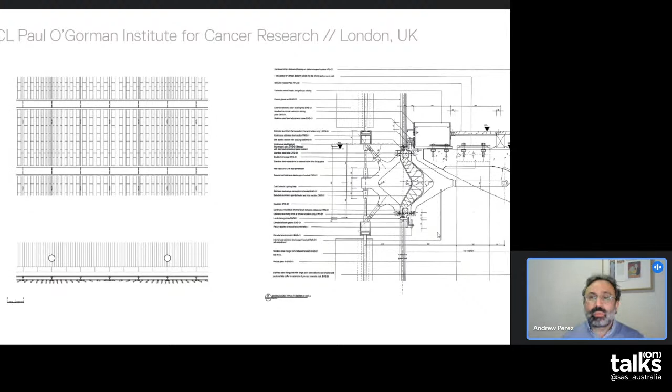They would draw their details in pencil at 1-to-1. For me, just beginning to understand how things came together in this very special way was a real learning experience. If you understand Grimshaw, it shouldn't come as a surprise, but for me, having come from Australia, it was a terrific experience working with wonderful people, putting this together, and then working on site as the site architect, seeing it all come together was really quite wonderful. The care that was taken, and taking the client through the journey, showed that these small things, the sum of all these parts, mattered.

One of the other impressive features was this sort of cantilevering stair. The existing building is the old UCL Hospital Nurses Home, which is a Grade 2 listed building, so our building abuts and connects to that. We have the classic architectural detail of the visual gap of this frameless glass connecting piece.

In that interstitial space, there was this terrific cantilevered central spine stringer precast concrete stair. There was so much structural reinforced steel in that precast stringer beam - it really is a steel stringer with a thin shell of concrete. But again, that all cantilevers off the floor plates and is connected to the glass facade with these simple pin joints that allow the stair to move.

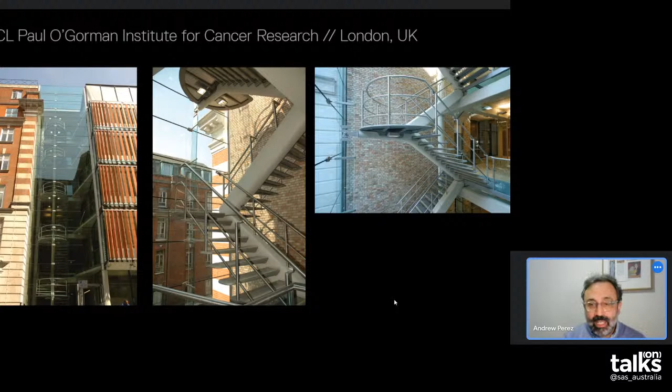It moves quite a bit and allows these glass restraining fins to slide up and down. There is no mastic or silicone or mechanical fixing here, so this whole system - stair, fins and glass - all move in unison. Working out the dynamics of that and understanding that attention to detail was a terrific experience for a young architect.

And again, working on some of these drawings, just trying to resolve that. It wasn't all glamorous - you can see here there's some cast-in conduit. There was no face-fixed light fittings here; they use light fittings under the half landings. So I also had the privilege of doing those cast-in conduit drawings, which is the less glamorous part of architecture.

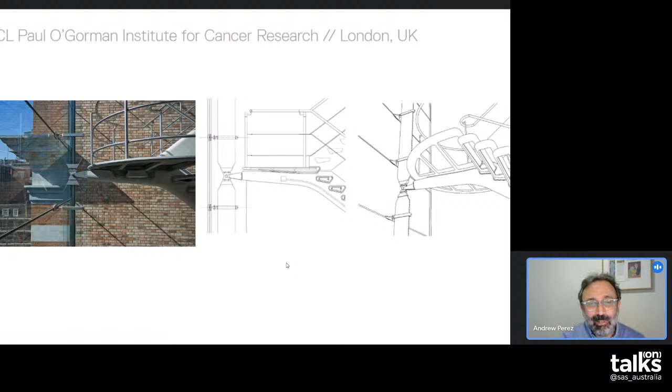But I guess we all go through that learning curve. And the other thing I realised was bang for buck. It's a simple series of stacked boxes, the building, of Grade 2 labs, with a Grade 3 lab on the roof space. So working to budget - if you look at the detail of the section here, all of that cast facade, terracotta, precast concrete happens in this front 5-metre write-up space. The rest of it is block work and simple stacked boxes.

I was understanding that part of the brief was that the building had to have a shop front to the street. They wanted to showcase these tremendous researchers doing life-changing work, so it was a shop front - though the researchers had a view about that. So we put all our effort in terms of budget and detailing to the front, saving our money at the back. Bang for buck was really important in order to respond to the most critical parts of the brief.

So I was starting to get an education about craft, materiality, context, conservation architecture, which is something quite new to a new country like Australia, but quite entrenched in Europe, and understanding the politics of budget.

And then the interior spaces again - this is the write-up area where all the researchers do the work, nice day-lit spaces through those terracotta louvers, these wonderful precast soffits, the reception area, French limestone, this anthracite desk. So celebrating materiality, and it was quite deliberate choices.

There's some off-form in situ concrete, the existing handmade bricks of the listed building next door, European oak, but not selected, so we were expressing the knots and the veins, and the stone to the reception desk, again expressing the natural characteristics.

The building, again, with its cast finishes, was quite machine-like, but the interior materiality we were very keen to explore, I guess, the warts and all imperfection of it all as a bit of a contrast.

One of my favourite pieces of the building is these precast soffits to the write-up areas that follow the force diagram. Where the forces are working, supported by the column, the precast concrete is up to 450 millimetres thick, but where forces aren't working in these coffers, it's scooped out and right down to about 90 millimetres thick. So this column is holding this piece on these flanges, and it suspends the pieces adjacent.

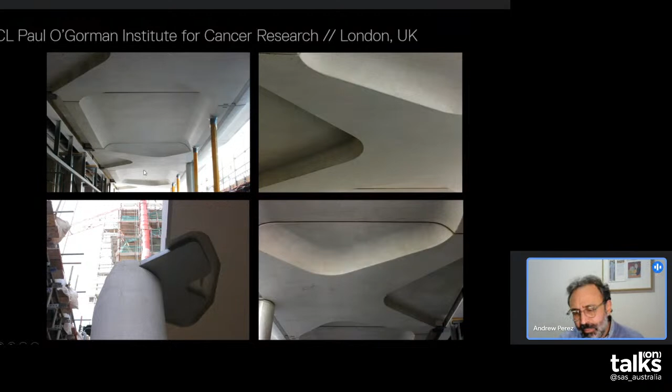That was working with a Belgian precast contractor, a tiny firm in Belgium, but very specialist work. Again, it was really working out the finest details, and the point of all this was concrete only where you needed it. So there was a real exploration of materials for that building.

Like I said, for me it was a wonderful introduction to Grimshaw. I'll talk about the next project, which is London, and I talk about this because it's a completely different end of the spectrum, but it set my career on a specific trajectory.

My boss at the time, Mark Middleton, who I believe might be on the call, asked me to do some work at Heathrow, a seconded role out at Heathrow Airport. I was quite reluctant, but Mark assured me it was going to be a good idea, and he was not wrong.

This was about the strategy, really. Understanding high-level detailed planning, complex statutory issues, and a very large client cohort.

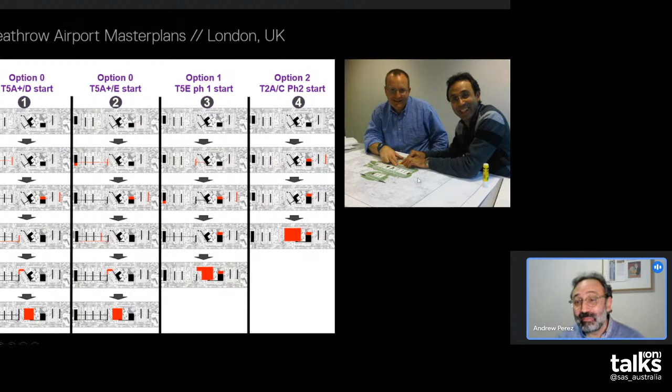A lot of my time on this project was spent going through little thumbnails, understanding all the permutations of runway locations, terminal locations, and literally cutting and pasting them on plans with the client.

But it was really a fascinating understanding of how an airport works in all its parts, how it works in its statutory framework. Basically, it was a sort of a master's class in international aviation, for which I really began to take a real interest in.

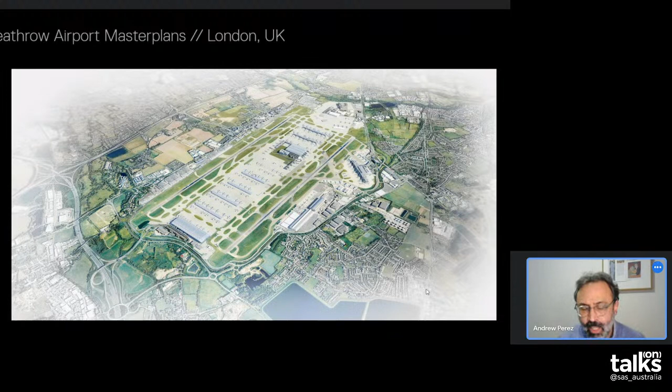It was fascinating. Again, it's the complexity, so many interesting moving parts, and it's distilled into these images that were used for press. But it sort of set me on a path.

As a result of that, after 2 years—well, it started as a 3-month secondment and ended up being nearly 2 years—I left that project and was considered a sort of an expert in aviation. At the time I didn't realise that, but then I quickly realised I'd learned an awful lot there.

Back in the studio, one of the next aviation projects I worked on was Istanbul's new international airport. Whereas I was talking about UCL about craft, Heathrow about understanding strategy, what this airport project brought me about was scale.

This is a brand new international airport in Istanbul. This is a rendering that we did to present the idea. This terminal, brand new terminal, is 1.2 million square metres of GFA. That's quite mind-boggling, really. This is the terminal that was, after design was resolved and submitted, built about 2 years later at incredible speed.

It's just a very, very, very large building.

So all that I'd learned at Heathrow about aviation and terminal planning was understanding how to, in the first instance, get the footprint right, so that people wouldn't be walking for kilometres and kilometres to get their gates. There was quite a bit of planning about understanding where you could optimise the building shape.

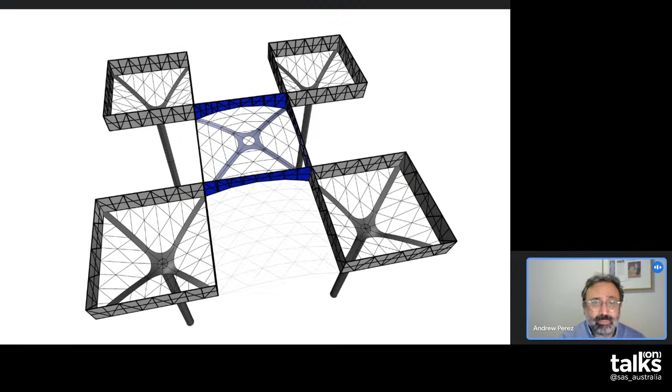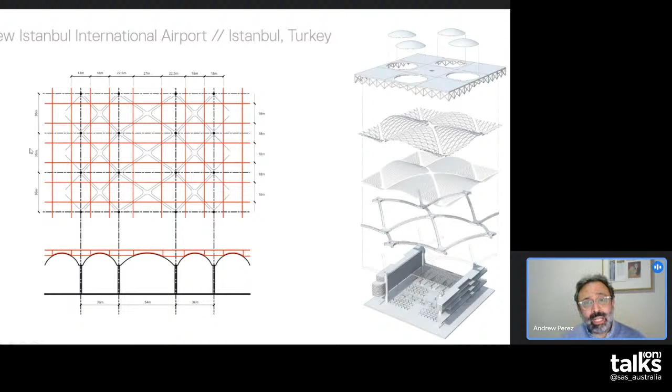That's something I began to appreciate at these gigantic scales. Just understanding the roof structure: simple tree columns holding up these units, the main dome suspended from those coffers, and the infill between the structural coffers. That ends up with efficient, simple tabletop units that give you very large, efficient spans. Then you just repeat them, stamp them out, and you get this grand, simple, beautiful, efficient way of designing and ultimately building.

I guess these images here are sort of the architectural expression of that idea. I don't have time to talk about the inspiration we took with these top-lit domes from Hagia Sophia, but you can see all of that. Again, it's not just about a structurally efficient system, it has to have some meaning and beauty too. That distillation, that coalescence of ideas, is important to the way we work at Grimshaw, and something I take with me onto every project.

From Istanbul, I'm going to move on to Muscat in the beautiful Arabian Peninsula in Oman. I was doing quite a lot of aviation work, and an opportunity came up to work on something completely different, which I thought I'd try. Again, encouraged by Mark, I said, why not? A Botanic Garden, something I'd never done. I'd visited some as a child, but had no much interest in it.

What struck me on my first visit to Muscat was how beautiful the place is. I had been to the Emirates, Qatar, and spent some time in the Doha office with Grimshaw, living there, and I thought not much of the Gulf states. But Oman and Muscat is like old Arabia, sort of like you'd imagine it in the movies, like Lawrence of Arabia. It was really, really beautiful.

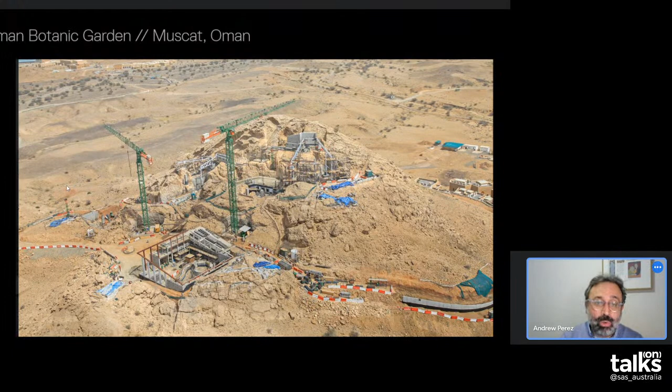This is a photo of what we got when we arrived there, and they just brutalized the landscape. You can see here, this is Corn Mubarak, one of the hills on the site, and they had literally carved a big chunk out of it, as if someone had taken a big bite out of what is the main geological feature on the site.

The client was quite distressed about this, and to their credit, decided to stop the project and start again. We had convinced them that we could do this, so we had to repair the damage and come up with a new scheme. Some images here show spaces for mechanical plant, these giant bunkers in this pristine desert landscape, and some of the buildings already built for teaching spaces were these faux architectural responses, fake castellated concrete blockwork pastiches. It was really quite distressing.

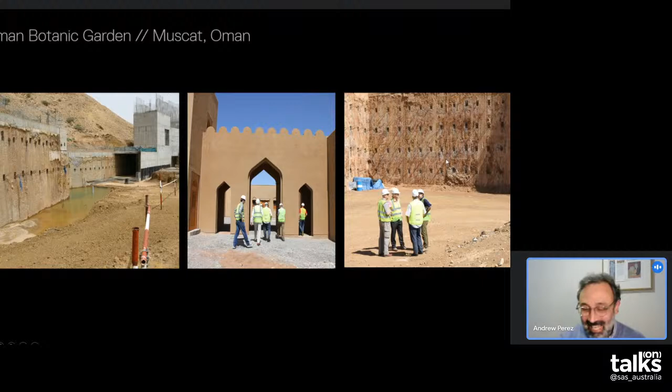There we are in the middle of this giant ten-story high bunker that was going to be filled with mechanical plant. That's literally me there, wondering, my God, what are we going to do? We can't fix this. But I guess what we did, what most men do, we climbed to the top of the hill and had a good look. We spent a couple of days out there, and for me it was a light bulb moment, understanding the power of place and landscape.

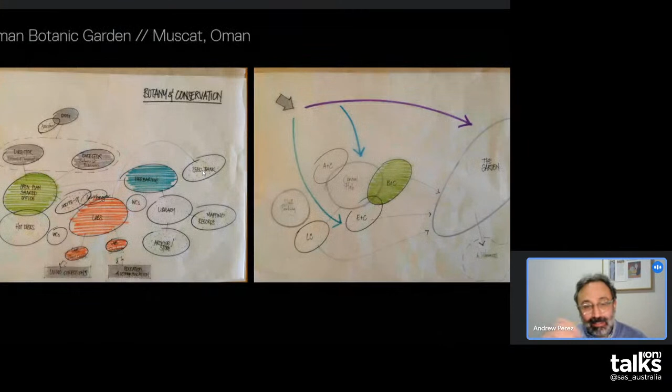So we started understanding—these are some of my drawings—trying to understand how the relationships between these habitats needed to happen. They need to tell a botanical story in an order that is correct, but also we need to make sure that visitors appreciate and understand the story they're trying to tell, a learning story as well.

So there's a pedagogical aspect to our design, and also something that is of interest to people, so it's a tourist attraction. This project will be subsidised for the first couple of years, but then it will rely on visitor ticket sales. So it was a deep immersion into very specialist ideas.

So exactly, again, understanding that we are in one of those habitats here in the desert, and the visitor journey, journey comfort and journey times, again, was something we had to consider.

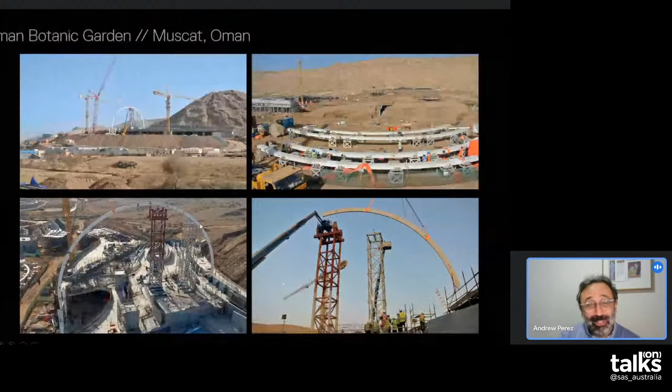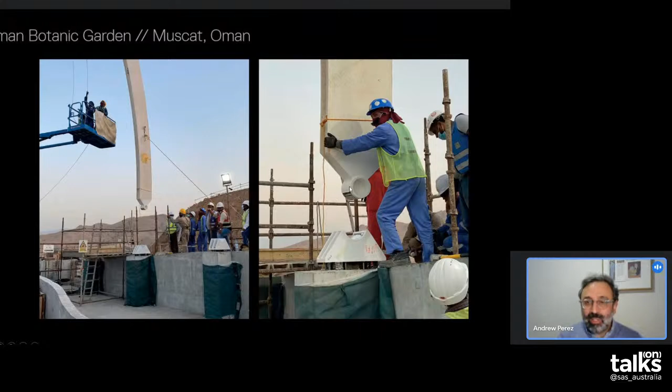These are some images of the works going on site at the moment, which is terrifically exciting. This is the northern biome again, and even at this scale, this muscular structure still has these lovely details—these pin joints at the base. Finding beauty in the simplest things is really something that I cherish working on these types of projects.

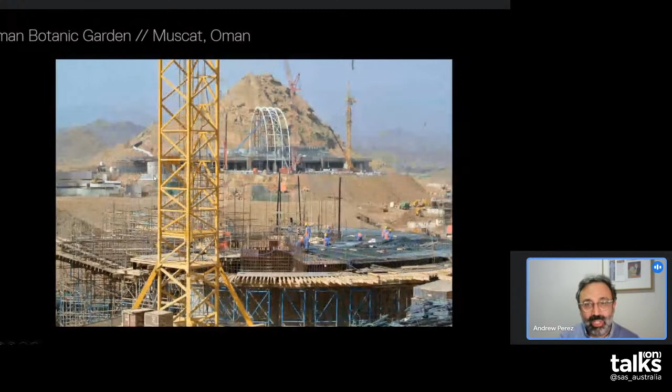Again, some mock-ups for the glazing units for this northern biome, in situ, testing, understanding that.

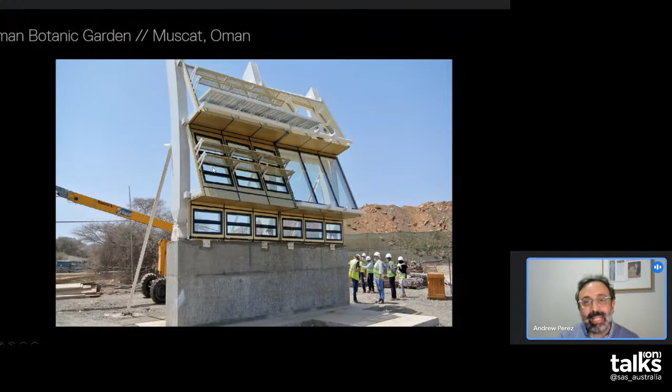So from that, I went back to aviation, a project in Lima, Latin America. Here I employed a bit of strategy. My boss at the time, Mark, I said there's a project in Latin America I'd like to see if we can go for. We didn't normally work in Latin America, it was considered new territory for us with great risk. But there were a couple of Spanish-speaking architects in the London studio and the New York studio, so I said, how about I have a go at this? So I did. I used my guile and strategy and contacts, and I chased this project, working it hard with clients, visits to Latin America, contacts through engineering firms based in Latin America, using my poor Spanish, and ended up winning it, which was terrific.

Subsequently, I managed to lose it too, but that's a different story. It was a thrilling win because it represented a new territory for us. I also had the privilege of visiting Lima as part of chasing the work, and I really fell in love with the place.

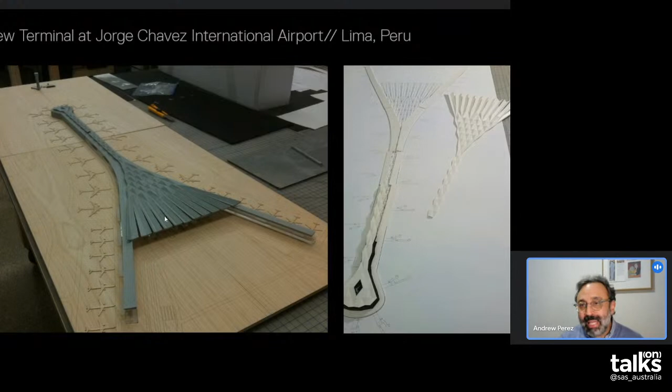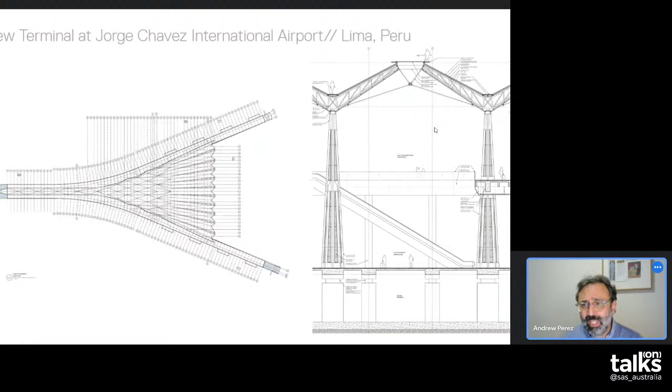We try to understand the place, understanding that Lima is a very urban city, but through much terminal planning with the engineers, and understanding that it's a place rich in culture and history, we tried to weave science and art together in some early model making, trying to understand the complex geometry through parametric modelling. The roof panels - there are 3 different roof panel types that make up this beautiful woven roof. The client was worried about how expensive this would be, understanding that the construction environment in Lima is perhaps not as sophisticated as in Europe, so we had to bear that in mind, and understand these structural systems to give us large spans which allow for future flexibility.

The terminal building would be designed and delivered in 2 stages. What I really appreciated here was just understanding place and people, whereas Oman was about the natural habitat. Lima is a gritty, sort of crazy place.

There was a big client team there from all over the world - these meetings crammed into little rooms with Spaniards, Colombians, Germans who were part of the client team, Peruvians, it was a terrific mix. Lots of analysis of shapes involved in terminal planning, but just understanding the people we work with, this group that came from everywhere.

What struck me too was how important the project was for Lima. It's a hardworking city of 10 million people, most working very, very hard. Every time I'd visit - about once every couple of weeks - I'd go through the existing airport and people would ask why I was there. I'd say I'm working on the new airport project, and invariably every person would give me special treatment, rushing me through because it was such an important project for them. It talks to prosperity and hope in such a hard-working city.

I'm going to now talk about a small project in Canberra, in Australia's capital city, when I moved back to Australia after 13 years in London. There was a chance to come back to the Melbourne Studio on the back of some airport work that I was able to help with, and we won a project, and I was asked, would you like to go back? And I thought it was time to come back to one of my homes.

One of the first things I did when I got back, because the airport project was stalled, was work on a tiny competition for a very small greenhouse in the Australian Botanic Garden in Canberra, the brand new National Conservatory. This was 500 square metres with a budget of about 4 million Australian dollars. So it was very small.

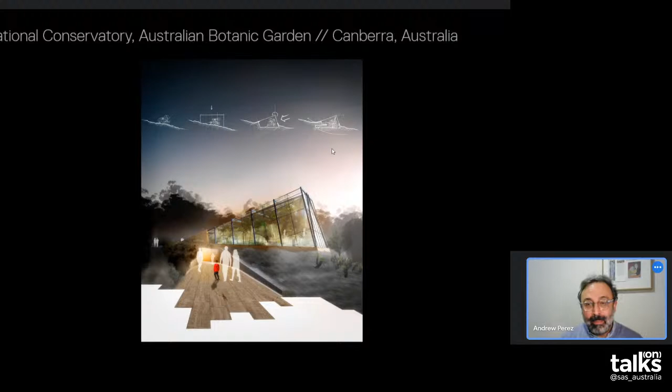I guess it spoke about scale, which I began to understand in a very different way after Istanbul. It spoke to landscape, which really resonated with me after working on Oman, again, but a very different type of landscape. So I was keen to apply the things I'd learned, but clearly in a very different environment with a very different architectural response.

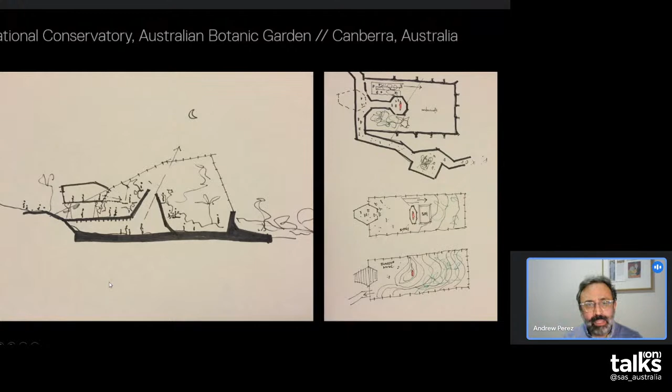We spent a few trips in Canberra on the site, which is native bushland in a bushfire-prone zone. It was a very topographic, rich site, very hilly on the side of Black Mountain. So this was about burying this little building deep into the side of the mountain, building as little envelope as we needed because the budget was very tight, and also developing a user experience that would bring you underground and you'd pop up into this lovely little greenhouse. So the early sketches, we developed those, and this lovely little pavilion building we managed to shortlist and went to Canberra to present to the jury.

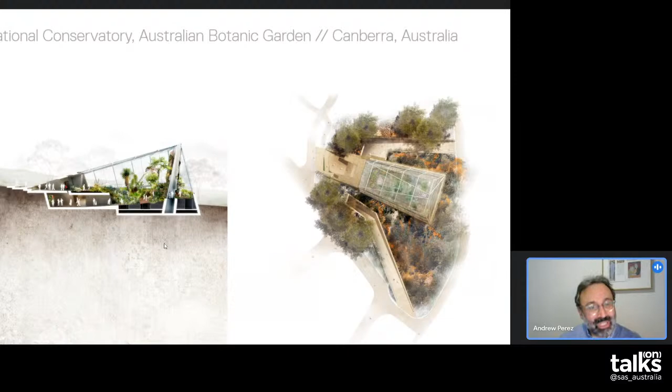Again, it was about understanding the visitor journey. These buildings have to perform. They've got to keep plants alive in them. They've got to propagate, and the plants need to prosper within these buildings. So the environmental controls are really critical.

So again, another Grimshaw idea is that the architecture needs to work hard. It's not just about a beautiful thing. It has to be beautiful, but it has to be doing everything it can structurally, dynamically, environmentally. We're dealing with the forces of nature: wind, gravity, sun, water, and the scarcity of these things.

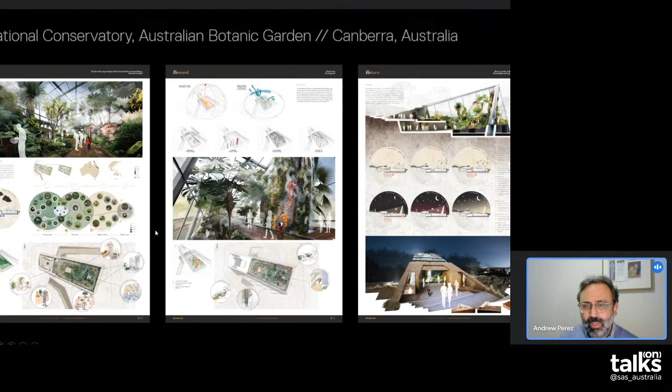So again, understanding that, working very hard with the specialists and consultants, hand in hand, and that architecture is not always prime—it forms part of a suite of experience and expertise. That's something pretty fundamental to how we work. It's strange for architects to say that, because normally architecture is the most important thing we do, and of course it is. But understanding where it fits is something I've come to appreciate deeply.

Sadly, we didn't win that, by the way. We came very close, but it was a terrific experience.

I'm mindful of time, so I'll wrap up with what I've been doing in the last 2 or 3 years. I'm firmly entrenched as a partner in the Melbourne Studio, one of 2 partners. Being one of 2 partners in a studio of nearly 100 people, you spend a lot of time running the studio, which is a new experience for me—dealing with resource issues, contracts, rent, budgets. It's been fascinating.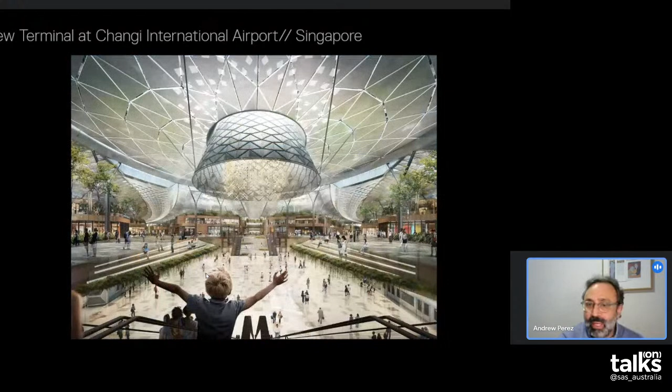But again, a very large 75 million passenger, 500,000 square metre state-of-the-art airport terminal. We made the final 3 and spent a year and a half on this competition, working very hard in London, Melbourne and Singapore. And this was, as you'd expect from Changi, all about passenger experience and these moments.

The project I originally came to Australia for was the refurbishment transformation of Melbourne Airport, and we've just delivered the first part of that five years later, which is the arrivals hall. For me that's like my hometown airport, and there's a bit of hometown pride because I remember popping to the airport as a little kid in my pajamas, waiting for my brother to come back from overseas trips. So the arrivals hall is special for many migrants who grew up in Melbourne, and the chance to reimagine it was really exciting for me.

Again, introducing craft - that's spotted gum natural timber that is local, but interpreting it in a contemporary, machined way, integrating the lighting and the signage, and paying real attention to touch, understanding that people get very close to these surfaces, and in airports sometimes they're quite difficult, stressful places for people.

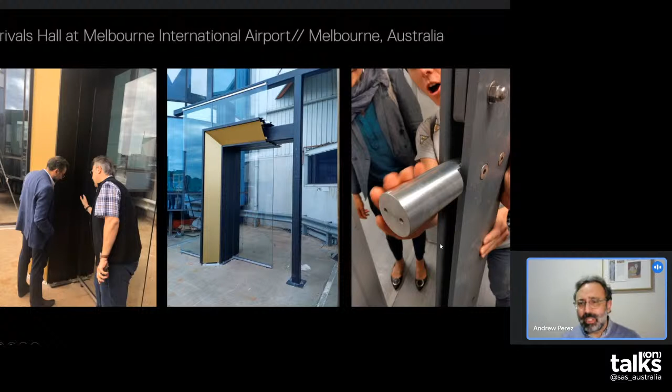Again, this is more of a challenge in Australia than in Europe, but mock-ups, testing, bespoke detailing, and making sure you're there at the factory inspecting these aluminium billets for the facade system - that's what working at Grimshaw in Europe taught me, that attention to detail is important, that the little things form the sum of the parts, they inform the whole. That's still one of the most exciting parts of the project. That's one of the project architects, Elisa, who's in awe at the quality, because we were really doubtful.

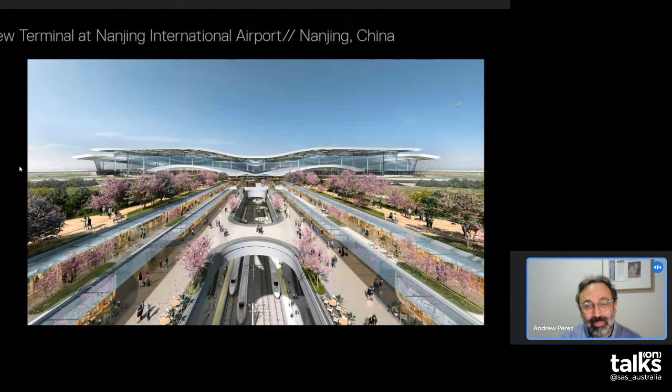And then we've been doing some work into China. In aviation, obviously things were slow at the beginning of COVID, but China was quite busy - first into the pandemic, first out. So we've done some work there. We are preferred bidder on this one, expecting to be announced as winner hopefully any day soon, in Ningbo. We are down to final two in Nanjing for the new terminal there. And this is the new Terminal T4 at Shenzhen, which we didn't win - that was awarded to Foster's - but we did pick up the Shenzhen Metro Hub. So it's new territory for us at Grimshaw and new territory for me, and again I'm very excited about that. Never a dull day working as an architect for an international brand.

Andrew, thank you to you. That presentation was terrific, and you really opened up your journey. That is quite thrilling, quite a thing - makes me personally jealous as an architect, and I hope one day I achieve some of those great projects. I have captured some questions from some attendees, so we can start with the general ones. Yes.